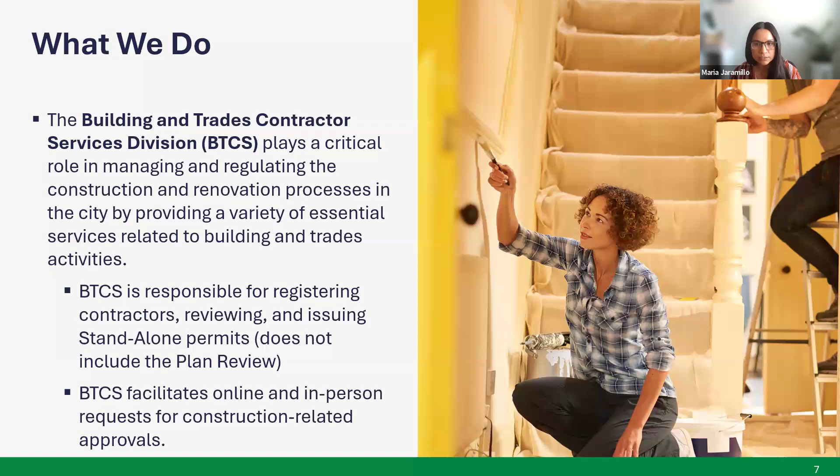The services we provide include contractor registration and support, homeowner permits (also known as homestead permits) and homeowner registrations, standalone building and trade permits that do not require plan review, activation or issuance of building permits and trade permits, and modification of standalone permits that do not require plan review or have not been through plan review. Usually, modifications of permits that have been through plan review require what is called a revision.

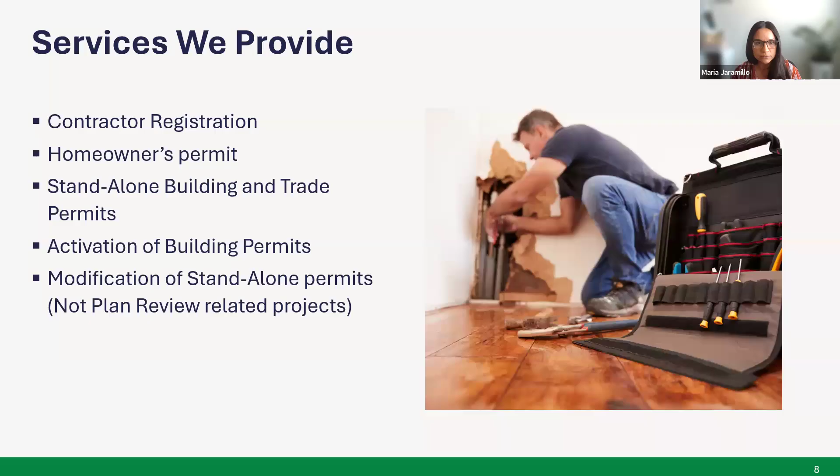Best practices, we recommend a couple of things. We recommend knowing what work is exempt from permits. There's a pretty good list put together that lists out what work is exempt from a building permit. For example, some painting, tiling, carpeting, countertops, playground equipment would be examples of what would not require a permit.

Another helpful practice is to know if the work that you're doing does require a permit. We have a really helpful wizard, the Do I Need a Permit wizard, that guides you through several questions on whether or not you will need a permit from the City of Austin, or what type of permit you will need if you're outside the city, depending on if you have services like Austin Water or Austin Energy as your utility providers. Then we want you to determine what type of project you have at hand.

After looking through the work exempt from permits, and using the Do I Need a Permit wizard, think about whether the project could need a building permit. Will it need plan review? Does the work include trade permits, or could it be just a standalone trade permit? Those are good questions to ask.

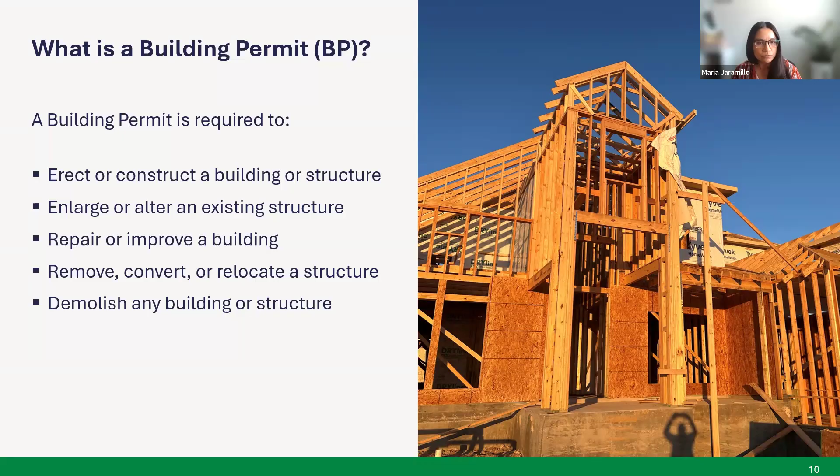Homeowners permits, or homestead permits, allow homeowners who meet certain qualifications to perform mechanical, electrical, and plumbing trade work for their own homes—work that is typically required of a trade contractor. There is a homeowner's permit page that we have, which also has a very helpful wizard within it that goes through the qualifications. Some of those qualifications are that you have a homestead exemption through the pertaining appraisal district, that you live in the home, and that you are performing the work if you're requesting a homeowner or homestead permit.

How to obtain a building permit depends on whether it needs plan review or whether it's a standalone permit. If it requires a plan review, you would submit a building permit application to residential review intake. After those applications and plans have been reviewed and approved, the permit would be issued, and then my team would help with the registration of the contractors, issuing of the permits, etc. A standalone building permit would be done directly from our individual webpage, the BTCS webpage, by completing a web form and selecting the applicable permit, and it would be processed directly through us.

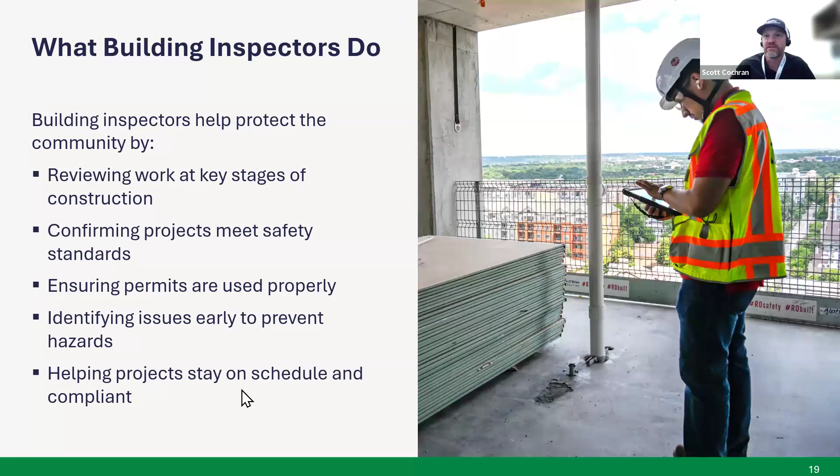What we do, and why do we require permits? Again, it's the safety of the occupants and neighbors—first and foremost, that's literally for your safety and welfare of you and your family. What sometimes gets a little lost in the shuffle is that you currently own that structure.

So why do I need to comply with, let's say, pool requirements if you put a pool in your backyard, or alarm requirements if you don't have kids? Well, we're not there just for the present snapshot in time—we're there to foresee the future, whether this will be a hazard to someone else. This includes compliance with adopted building codes, fire and life safety protections, proper installation of electrical, mechanical, and plumbing systems, and construction that meets structural standards.

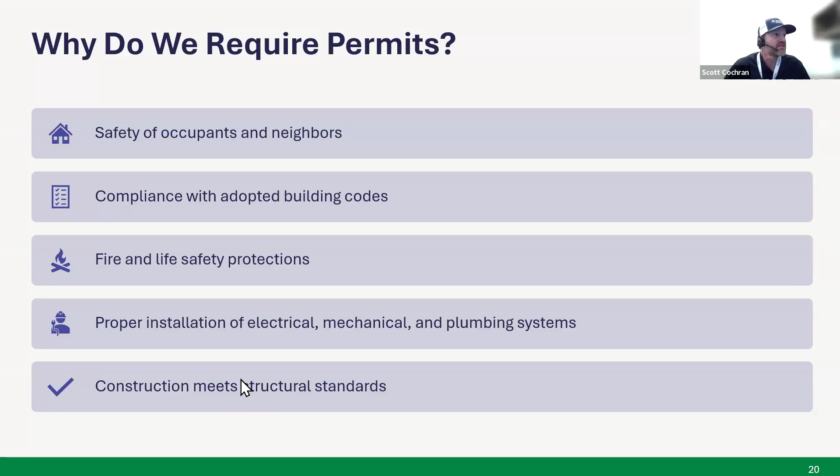Why should I get a permit? Living in the city of Austin, it's required by local city code. In some cases, it's required by state law, depending on what trade you're doing. Again, required under adopted technical codes. And getting a permit ensures your project meets safety and legal standards.

I can't tell you how often we see, unfortunately, we come behind on the backside of an unfortunate homeowner that has hired someone to do work. They did it on their own, unpermitted, without oversight of an engineer for their plans, and now we're having to work backwards and uncover wallboard and so on, and still including the oversight of engineers that costs $2,000 a piece. So it's important to do the right thing in the beginning. It'll work out for you and your family in the long run that way.

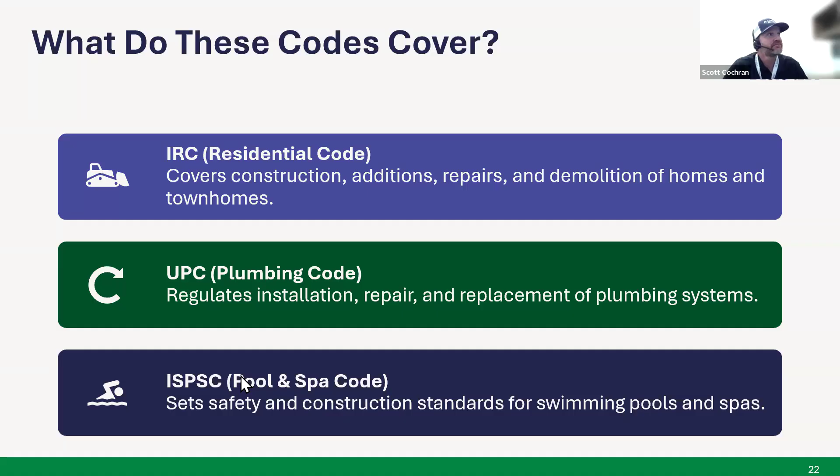Next slide. When a permit is required, it is very broad, I would say. I kind of want to set the expectation before I get into these slides.

I would fully encourage you to go on to the Do I Need a Permit wizard that Maria was sitting on a minute ago. Try to get into and log in to view our Land Development Code where we've amended the IRC and the UPC, and kind of get an idea, wrap your hands around what we actually do and don't require.

But I try to hit on the more frequently asked questions when it comes to this. So when a permit's required, constructing, enlarging, altering, repairing, moving and demolishing of structures. If you're doing any of those things, the first question you should ask yourself is, do I need a permit? Go online and try to find those resources to determine that. And then of course changing of occupancy. Next slide, please.

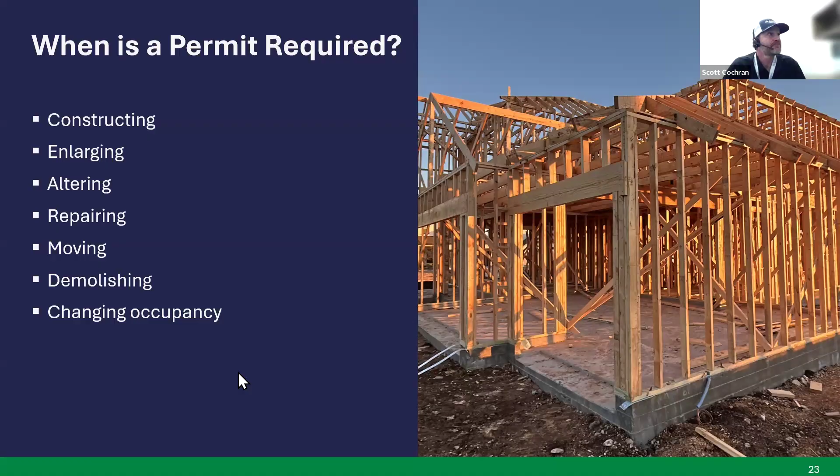To continue, when a permit's required: installing or modifying electrical systems, plumbing systems, mechanical systems, gas systems. Permits must be obtained before the work begins. In emergency situations, you have, I believe, 24 business hours to start beginning those stages of grabbing a permit. Again, there are certain things you can do within these systems that are listed that you may not need a permit for. So it's a very broad area of trying to figure out if you need a permit. I just encourage you to go online. Next slide, please.

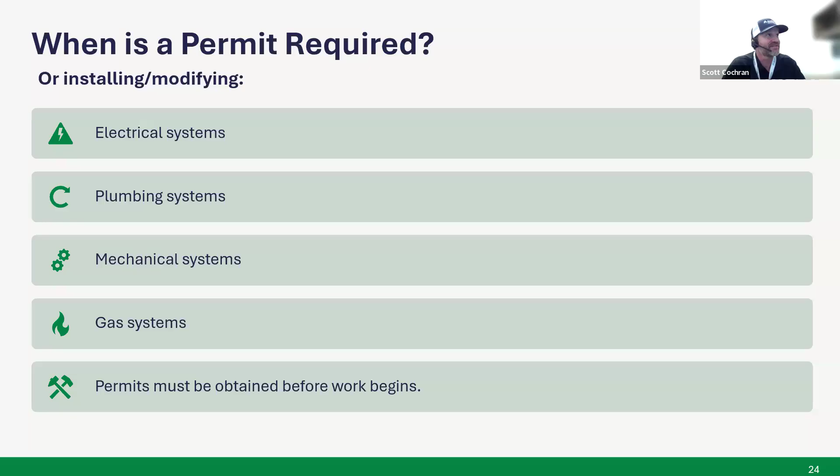Work exempt from permits for residential work. Again, just kind of touching on the more commonly asked questions that we get. For small structures, detached accessory dwellings, 200 square feet or less, under 15 foot tall, no plumbing, I would say no electrical as well, not used as a living space.

Fences and walls 7 feet or less don't require a permit. Retaining walls less than 4 feet high, no surcharge or load. I would say retaining walls are always one that we get. You have to include the footing, which goes underground, you can't just measure from the grade up. We also take into consideration if it's supporting a load or not.

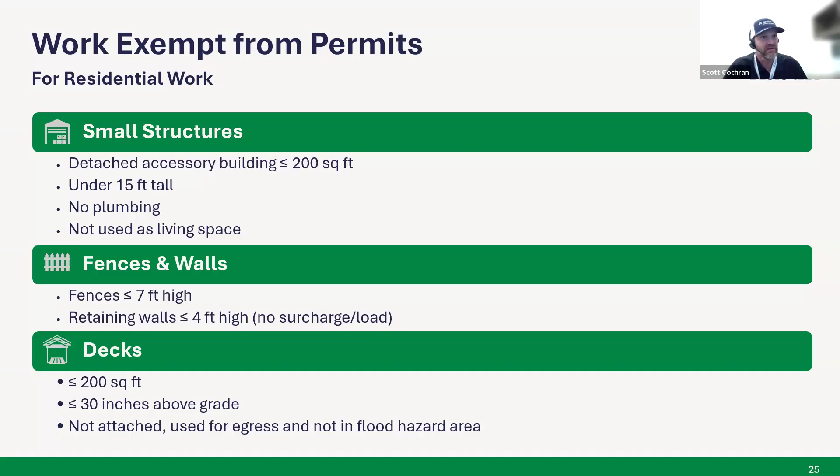Decks as well, 200 square foot or less, 30 inches above grade or more would require a permit. Not attached, use for egress and not in a flood hazard area. Again, these are just some very, very common questions that we get. All this information you can find online or in the Land Development Code. Next slide, please.

Residential minor work exemptions. I'm not going to read through all of these, but I would say site and exterior prefab pools 24 inches deep or less, that's a big one that we get quite often. Roofing exterior repairs, another we get, is if you're just replacing your asphalt shingles and you're not in what we call a WUI area, wildland urban interface area, with 50% or more replaced.

Those will not require a permit. If you're replacing your decking 128 square feet or more, it would require a permit.

Interior and structural repairs, I think Maria hit on this a little while ago. Finishing work, paint, tile, cabinets, and so on. Anything less than 128 square feet, or if it comes to wallboard, foundation, or floor decking, wouldn't require a permit. Garage door replacement, same size door replacement, also wouldn't require a permit.

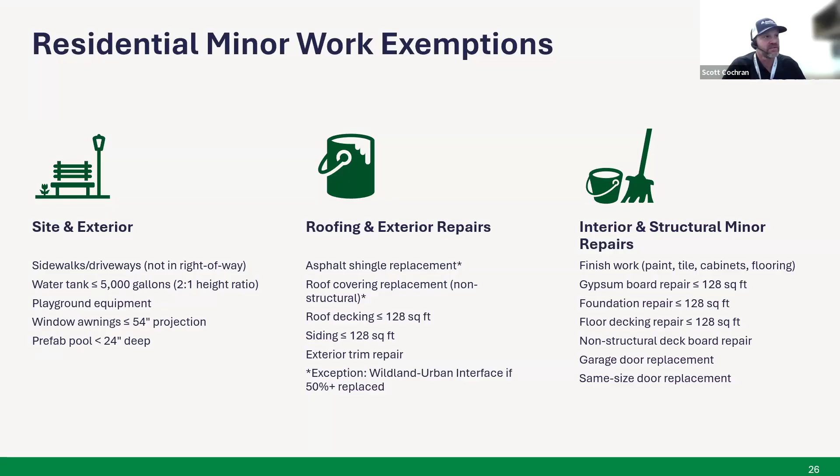Again, it's a wealth of information, and I would just encourage you to go on our website. That will be it for me, and I'll pass it along to Colin.

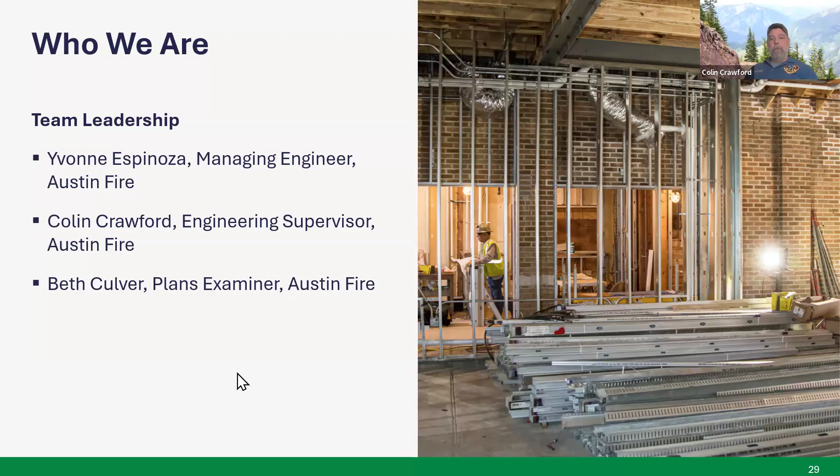Fire prevention at plan review, this isn't about inspections, it's about plan review. We get involved in plan review at 3 stages really. We look at sites and subdivisions, could be replats, could be whole new subdivisions. A lot of single family homes don't have a site plan component, but some do. We also do the building review, actually reviewing the proposed structure. And then finally, if mitigation is required, we will do the sprinkler plan review.

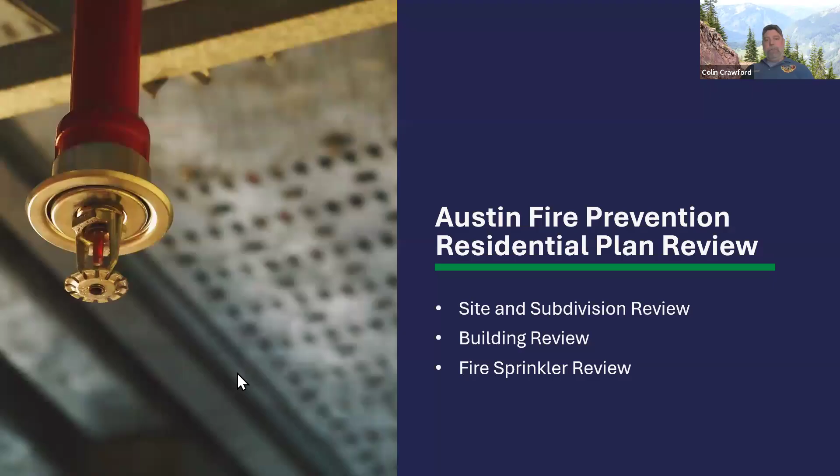Next slide, please. Primarily in a subdivision, we would look for essentially access roads. We would look at the hydrants and some of the hydraulics of the site plan of the subdivision itself, and if there's any special conditions or special circumstances, we would take a look at those as well.

One thing to be aware of is we do require that for a single family home there has to be at least one hydrant, and sometimes more than one, within 600 feet. You have to be able to get from the hydrant to every portion of the outside wall of the home within 600 feet. And so if you have a condition where that's exceeded, we may require mitigation, because it can delay firefighter response and the ability for firefighters to respond to an incident.

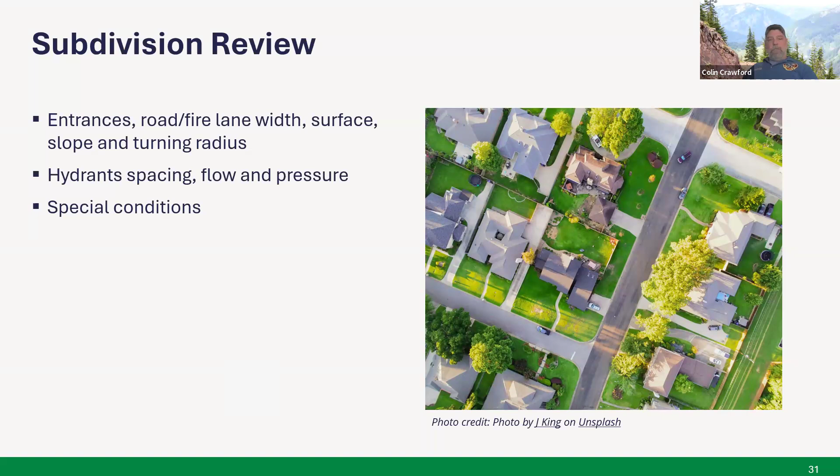Next slide, please. For the fire lanes, we look at the fire lanes and roads. We're looking at the surface. The surface can affect, for instance, maximum slope. We look to see if it supports our apparatus structurally. We also have some minimum sizes, like the width of the fire lane or road, the overhead clearance. We have requirements for those, so our apparatus or fire trucks have the ability to get to the incident and the ability to leave, to get away from the site when they're done.

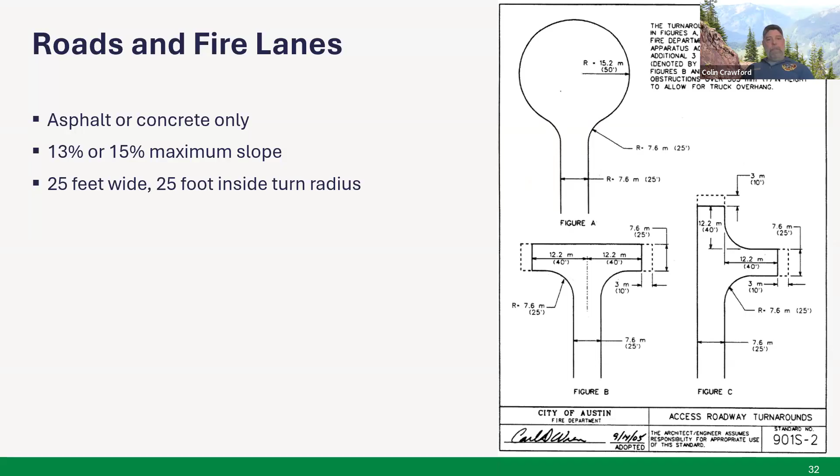Next slide, please. As I mentioned before, at least one hydrant, if not 2, and it depends. For one hydrant, there's a minimum flow required of about 1,000 gallons per minute to fight a small house fire. But as the size of the home, the size of the fire area increases, the flow demand increases. One hydrant can really only support a theoretical maximum of about 1,250 gallons per minute, which means if you have a flow demand of 1,750 gallons per minute because your house is more than 3,600 square feet, you're going to need more than one hydrant. So you're going to need 2 within that 600-foot distance.

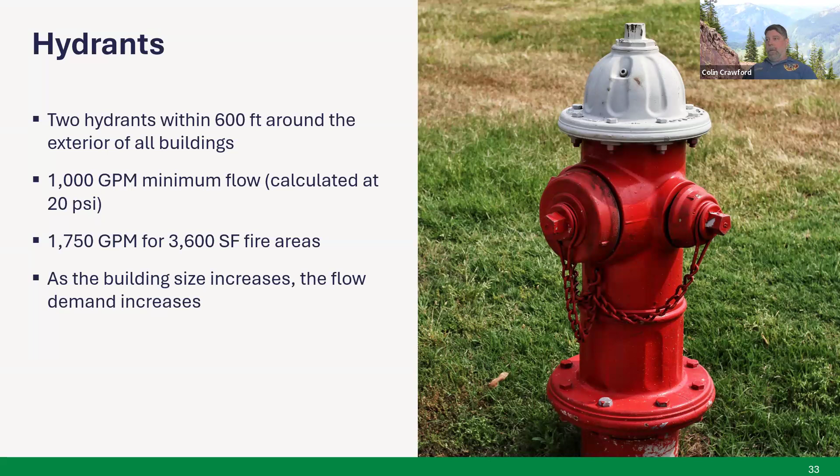Let's see. Next slide, please. So flag lots are a site plan issue for single family homes that you might encounter. A flag lot basically restricts the firefighter's ability to access the home and typically extends the distance. So we typically have to review those to determine whether or not there's going to be an issue.

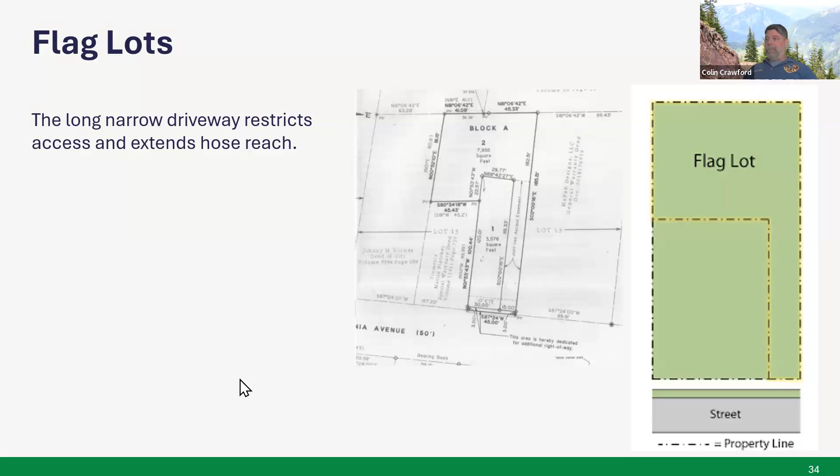Next slide, please. We also have many places in the city that have inadequate flow. They don't have that minimum 1,000 gallons per minute, or possibly a higher flow depending on the requirements. There are places that don't have hydrants or just no water altogether, so we'll take a look at those. The main thing to understand is the code essentially requires a certain amount of water availability. For a typical small house, the fire department could use possibly 60,000 gallons of water to fight that fire. If the house gets bigger, it could be something closer to 250,000 gallons of water. Where we don't have water infrastructure or it's inadequate, the fire apparatus has a small tank aboard, about 500 gallons, and they need to essentially ferry water from a water source to the house fire. So you can see it's a very resource intensive problem to fight that fire, which is why it's so critical to mitigate the situation where there's inadequate flow or inadequate access.

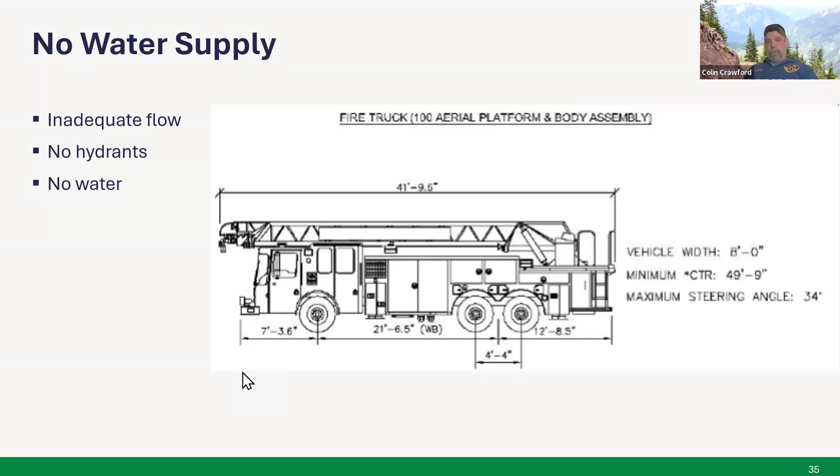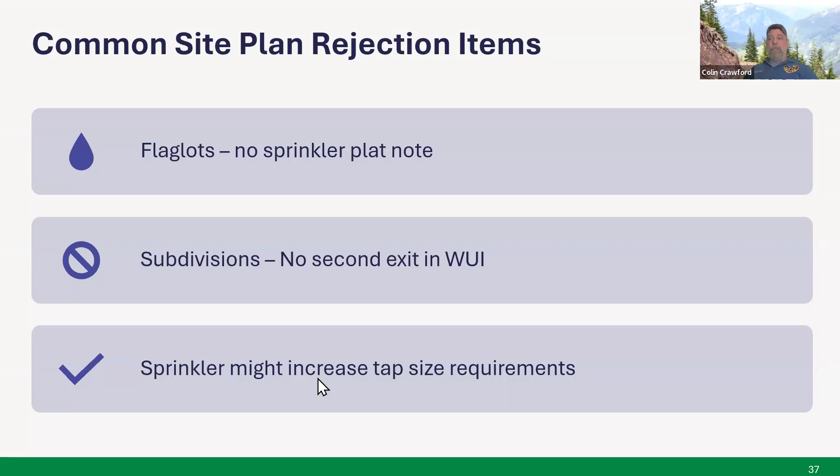When we get to the actual building review, we did look at flow and hydraulics at site plan sometimes, but we have to reevaluate it based on what you're actually proposing to build. So one of the first things we look at when we get your plan is access.

The fire code requires that a fire department has to be able to get from the fire access road, basically where the fire truck parks, to all portions of the outer wall of the building within 150 feet. There are some mitigations and exceptions.

If it's a one or two dwelling units on one lot, we can extend that distance out a little bit. If you have a sprinkler, that's a mitigating factor, and we can extend that distance out a little bit as well.

Generally speaking, with what we call the home amendment, the new third dwelling on a lot, I found that most of them, not all, but most, it's very difficult to fit a third unit on a single family home lot without having it fall outside that 150 foot access travel path.

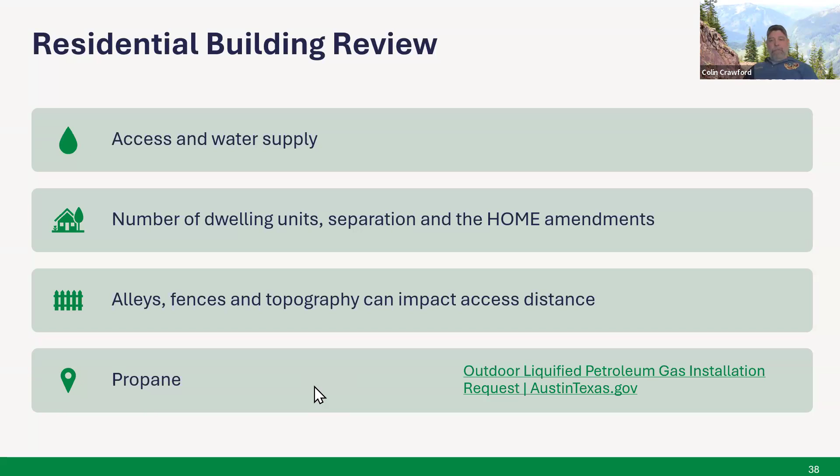One thing we're reviewing for at the plan review level is the riser location. We can't treat Central Texas the way it was in the past, as a place that doesn't typically freeze—that's just not true anymore. We've had a rash of broken pipes out there, so we are requiring the riser location to be freeze protected.

The best way to do that is to put it inside, so it literally rises out of the ground in a conditioned portion of your house. We're asking you to show that on your plans.

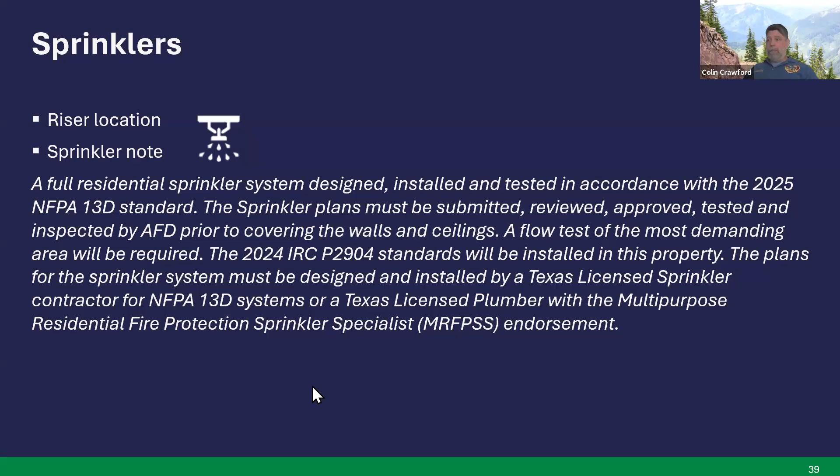Most common rejection items I've seen when reviewing a house for fire compliance: either we don't have a flow test or the flow test is expired, or we have inadequate access—meaning you're too far away from the point of fire department access—or we've got that third dwelling issue.

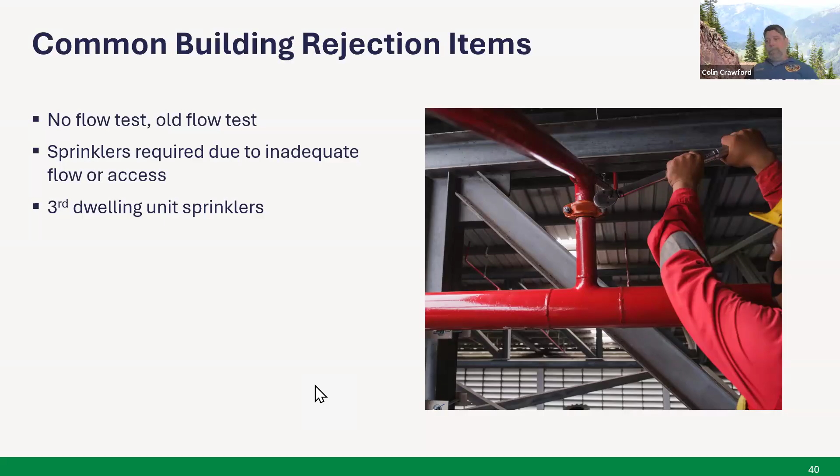Next slide, please. Okay, next slide.

When we review the system plans for the sprinkler itself, we're reviewing it against the NFPA 13D standard for a single family home. We'll look at a lot of different things—I'm going to go over some of these details here.

We check if the floor plan matches what was presented in the architectural plan, and if a professional has sealed the plans and dated them properly. This is critical: we look at the data sheets for all the equipment used in the sprinkler system to make sure it's listed appropriately for the purpose. And then we look at the plans.

Next slide, please. We'll look at the plans to... sorry, go ahead and move to the next slide.

We also look at the plans to make sure that the equipment on the plans matches the data sheets you've provided, to show that it's appropriate.

We'll go ahead and re-review the hydraulics. If your flow test is out of date, we're going to ask you to get a new one to make sure that the flow and pressure at the street is adequate to supply the system.

We're looking again at the water line route. Sometimes the riser location changes between plan review and system plan review. That's understandable, it happens, but we do need to look at it to make sure it still meets our code requirements. And then we'll look at the most demanding area in terms of what the sprinkler has to do, and then we'll look at your calculations to see if it's back calculated and the system will support it.

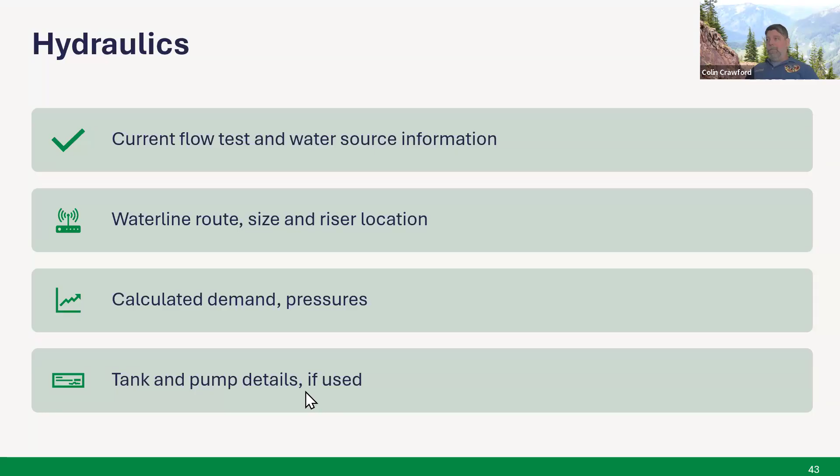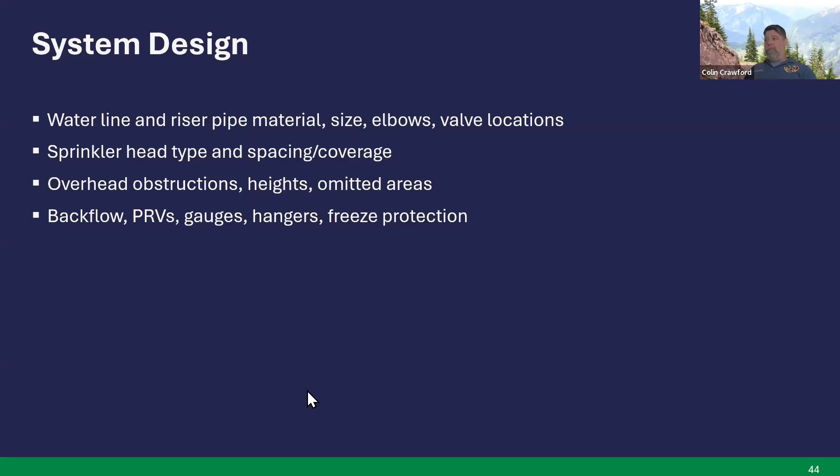A lot of other details in the system plan review: the water line, the riser, the elbows, the pipe sizes, the valve locations, if the sprinkler heads are the correct type, if they cover appropriately, if there's any overhead obstructions. We even look at structural, how they're hung, if there's any gauges or backflow preventers, pressure reducing valves.

So the most common rejection items we seem to see in a sprinkler plan review are the riser location and freeze protection, the spacing of the actual sprinkler heads, and hydraulic calculations missing or inadequate.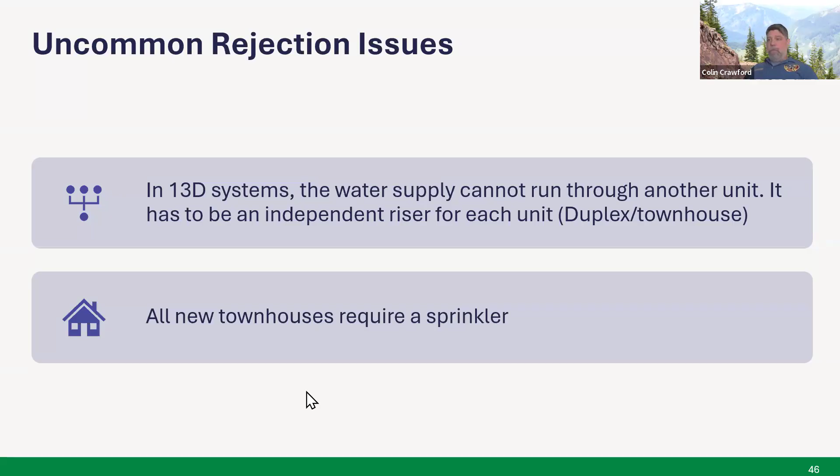I'm Beth Culver, I'm the lead WUI plans examiner with Austin Fire.

So I'm going to walk through the basics of the Wildland Urban Interface Code permitting requirements. This code applies to areas in Austin that face a higher risk of wildfires. Our goal is to help you understand when the Wildland Urban Interface Code applies, what it requires, and how to prepare your permit submittal. By the end of this segment, you'll know the 5 steps you'll need to follow for any project in a WUI area.

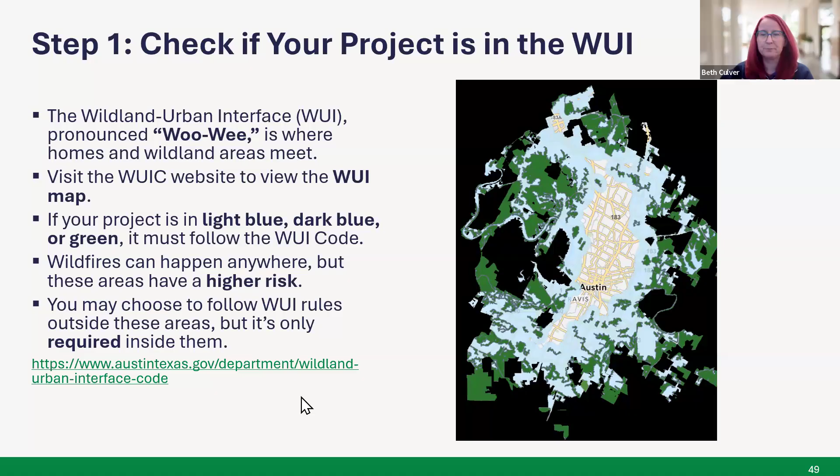So step 2, once you know your project is in the WUI, the next step is figuring out which zone you're in. Zone C is the areas in light blue or in the layer labeled Zone C. Zone A and B are shown in dark blue. And then green areas are currently wildland, which will become either Zone A, B, or C, depending on how much of the land you end up developing or leaving wild.

If you're not sure what color you're looking at, you can always click on the map and a label will pop up. If your project is in a dark blue or green area, you'll also need to measure how close your structure is to the nearest wildland area that's planned to remain as wildland.

The map shows wildland in green to help you locate it, but the green layer is only an approximate guide, so you still must measure to the actual wildland edge, not just to the green layer on the map. You can do that on site. A good rule of thumb: if an area isn't watered or mowed weekly, it's probably considered wildland.

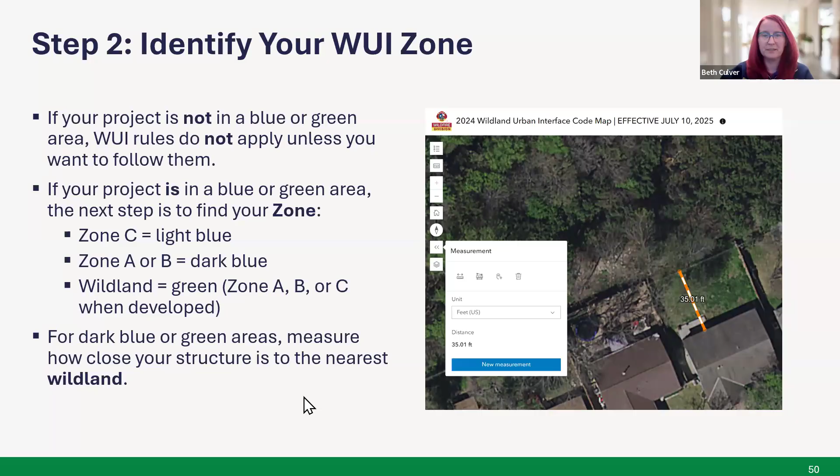Step 3 is understanding what the WUI code requires. Austin uses the International WUI code along with local updates that reflect our specific vegetation, building styles, and wildfire behavior. Here's a quick breakdown of the requirements.

Chapter 4 covers access, which is how firefighters reach your property, how you evacuate, and how water is supplied. Chapter 5 covers ignition-resistant construction. This is where your zone matters. All zones follow the basic sections, and each zone has additional requirements for exterior materials and openings.

Chapter 6 covers vegetation management and the Ember Ignition Zone, which is a 5-foot non-combustible zone surrounding all new buildings and additions to existing buildings. Appendix A is another good place to become familiar with, as it covers rules for things that create sparks or heat like fire pits, grills, and generators. Make sure to visit the WUI code website for a simplified guide that outlines the rules for each zone.

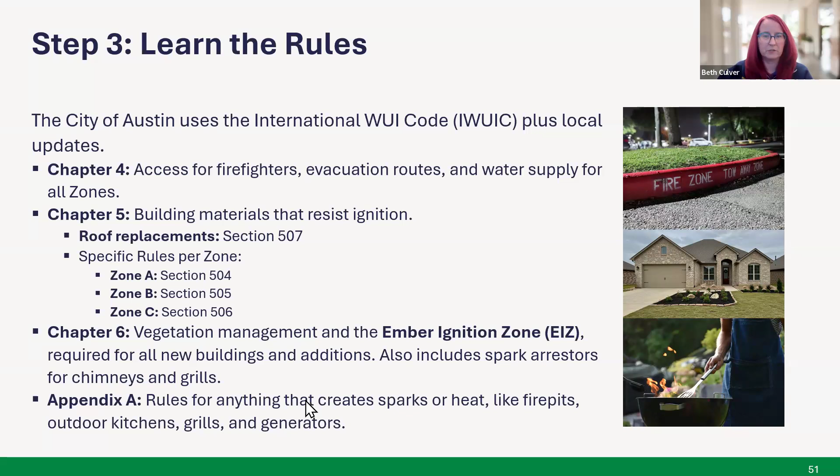Step 4: determine whether your project needs a permit. Our website lists which projects are exempt from permits. This was covered earlier in the presentation, but keep in mind that even if a project doesn't require a permit, it still needs to follow the WUI code if it's in a WUI area.

One important note: if you're replacing more than 50% of a roof in a WUI area, outside of a WUI area you might not need a permit, but within a WUI area you must get at least an express permit, or if you have a larger scope of work, you can include the work within that permit. Outside of the WUI, some roof replacements may not even require a permit if they're not associated with another project. There are only 2 types of projects that don't have to follow the WUI code at all.

The first is small accessory structures under 120 square feet that are more than 50 feet away from another structure, as they pose less risk to other structures as long as they're at least 50 feet away and small, like a small shed. The second is agricultural buildings that are also more than 50 feet from another structure, more like farm type agricultural buildings.

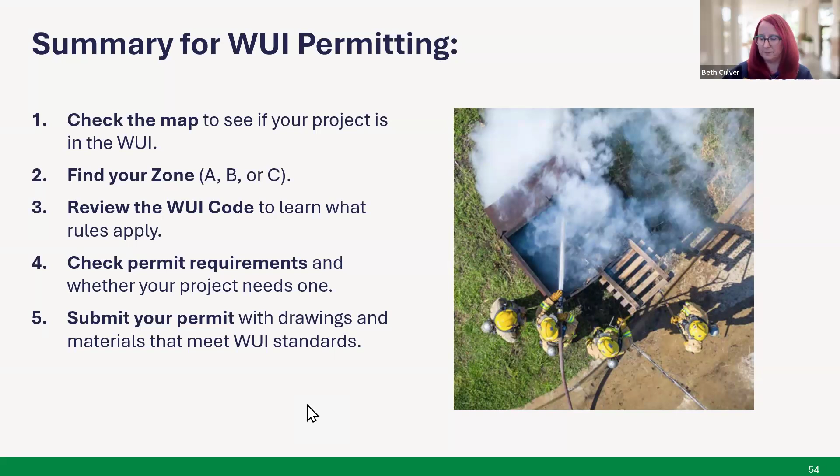The resources available on the Wildland Urban Interface Code website include, but aren't limited to, the WUI map, plan review resources, the list of pre-approved materials I mentioned earlier, as well as FAQ.

Thanks for taking time to learn about the WUI Code permit requirements. Following all of these steps helps protect your project, your neighbors, and our entire community from wildfire risk.

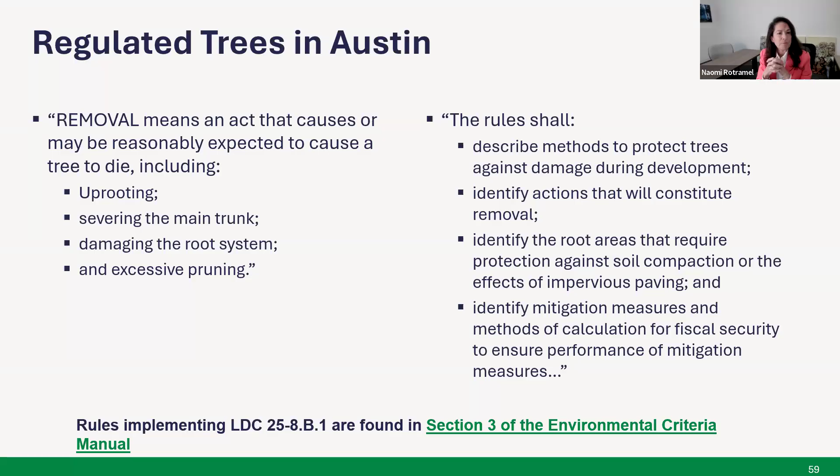There are a couple of paths regulated trees go through in the development process: either they're preserved, which must meet the criteria in the Environmental Criteria Manual 3.5.2, or they're removed, and that definition of when they can be removed is under the Land Development Code 25-8-624.

You can find a lot of information on our homepage. If you do a simple Google or Bing search for City Arborist, Austin, Texas, it'll land you on this homepage. We spell out the levels of protection, and also have a lot of helpful FAQs and instructions on applying for a permit and applying for an ABC account, which Maria mentioned earlier.

Regulated trees in Austin include all trees once they reach 19 inches in diameter, including ash juniper and invasive hazardous trees. Certain tree species are designated as heritage once they reach 24 inches diameter, per LDC 25-8-602. Those include oaks, pecans, elms, walnuts, and other trees. Palm trees are not regulated under the city ordinance. So yes, a hackberry is regulated, and yes, an ash juniper is regulated.

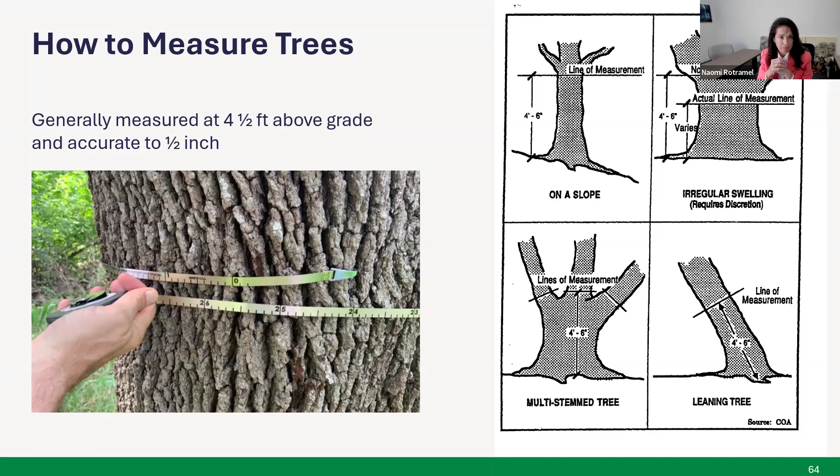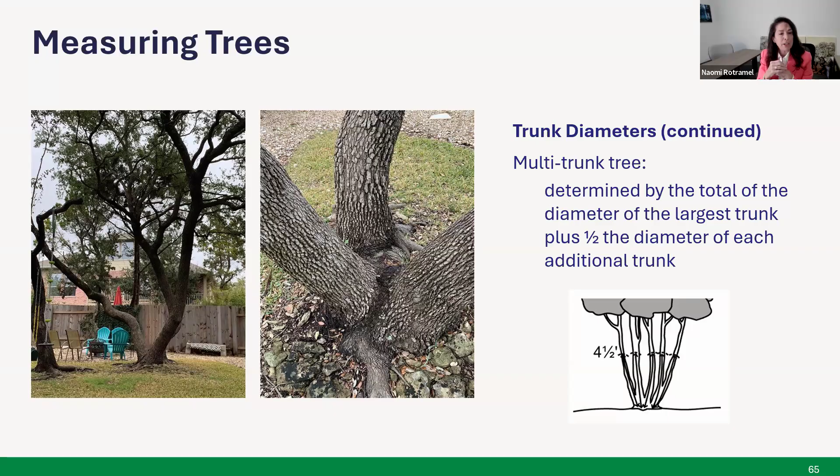There's also a way to measure multi-stem trees. You take the largest diameter, add up all the smaller diameters, divide that by 2, and add it to the largest diameter. So there are instructions on our homepage on how to measure a tree.

Back to going through the tree rules in the Environmental Criteria Manual. Most damage to trees occurs during the development process. Trees are protected both through review of plans and enforcement of tree protection on active construction sites. The tree preservation criteria are the rules the city uses to determine whether or not a tree is likely to survive construction, a project, or other impacts, based on best practices. If these criteria are not met, the tree is at significant risk of premature death, such as impacts that constitute removal. Many times trees do not die immediately after construction damage; it can take 1 to 3 years for them to die. So we do want to see the protection up at all times.

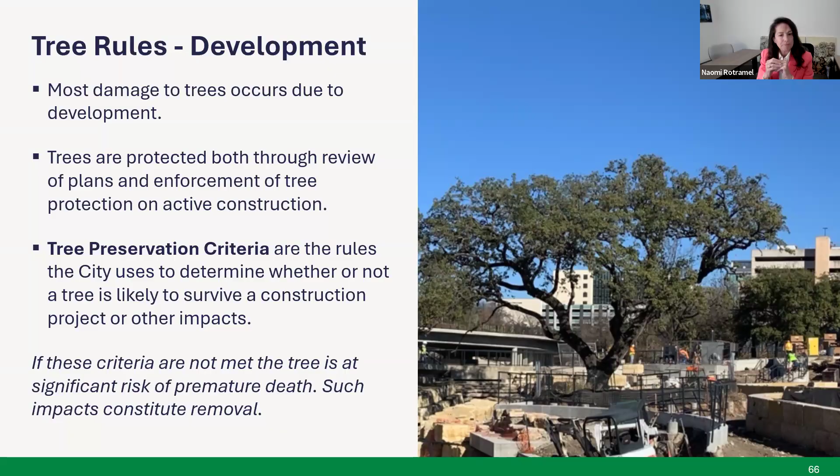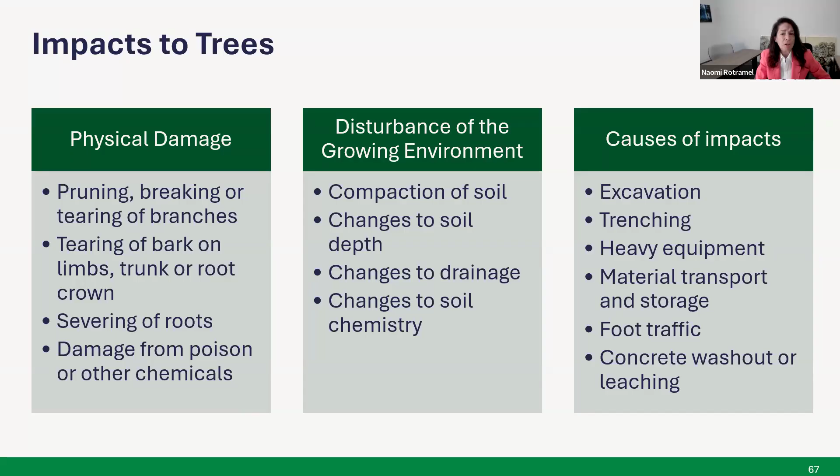Let's talk about impacts to trees: physical damage, disturbance to the growing environment, and some causes of impacts. Physical damage, which happens on construction sites, includes pruning, breaking and tearing of branches, tearing of bark on the limbs, trunk or root crown, severing of roots, and damage from poison or other chemicals. Disturbance includes compaction from running over the soil, changes to soil depth, changes to drainage, and changes to soil chemistry. Causes of impacts include excavation, trenching, heavy equipment, material storage and transport, foot traffic, and concrete washout or leaching.

Here's some examples from active construction sites. On the front, they do have wrapping around the tree, but fill right in the critical root zone, probably in the quarter critical root zone, and there's cement washing out. Another site where a tree has soils next to it. The picture in the right-hand corner was likely done without a permit - that was spotted by one of the inspectors, and that is trenching inside the critical root zone of a couple of heritage oaks. The last picture on the bottom is fill and inadequate fencing.

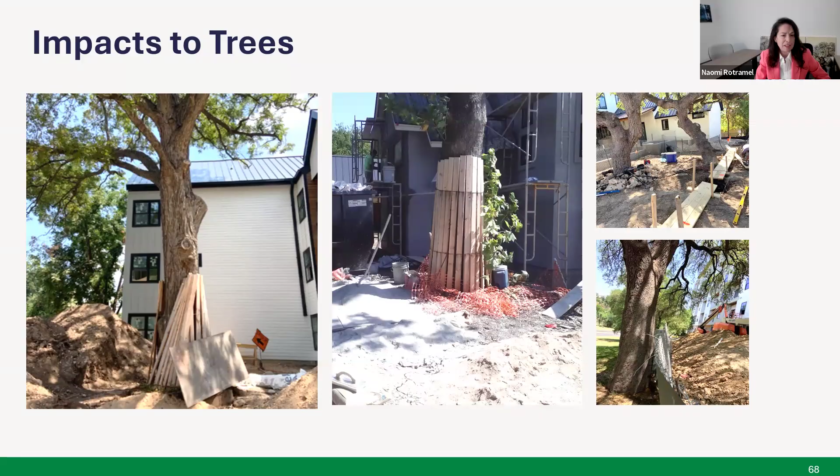Along with impacts in tree review, we're going to look at the existing impacts. Here's a good example of a residential house that the applicants needed to expand. We're going to look at existing impacts and matching those existing impacts, which would be no wider nor deeper. Your tree reviewer will help work this out with you. Here's a good example of existing calculated impacts.

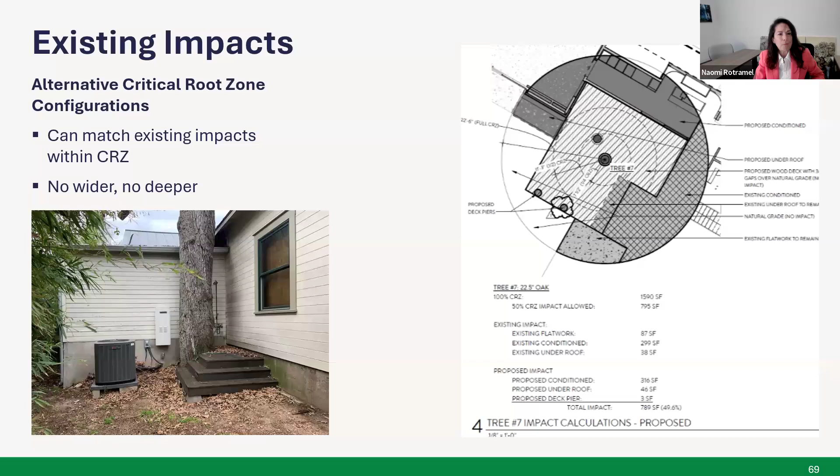So a little about tree preservation criteria. You can find this figure on the right in the environmental criteria manual. It's widely adopted throughout the United States. It defines a critical root zone. Tree roots are usually much larger than a critical root zone, but this calculation is based on best practices and what it takes to keep a tree alive.

So if you have a 20-inch tree, you're going to walk out 20 feet, and that's your full critical root zone. Inside that, the half critical root zone would be, in this example, 10 feet, and then inside the quarter would be 5 feet. So the critical root zone is a circle around the tree, the radius in feet equal to the diameter in inches of the trunk. The half and the quarter are smaller circles within the CRZ, and the CRZ, critical root zone, is not the extent of the tree root system.

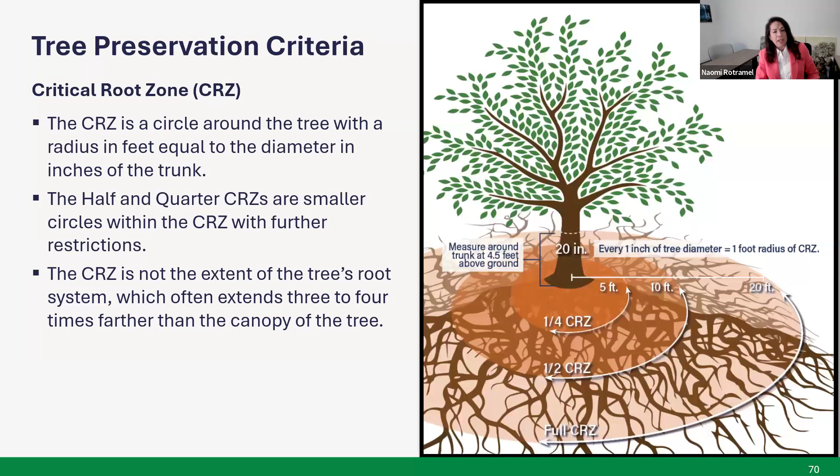What we are looking for in plan review, site plan review, residential plan review, and standalone tree permits, which I'll get into later, is criteria one: no more than 50% of the total critical root zone may be impacted. A little example here: 50% impact would be not compliant, 30% impact would be compliant. And then we have trenching and 60% impact. Unlike impervious cover, if you sever the arm and expect the hand to survive, it won't. So we're going to look at that trenching also in the impacts.

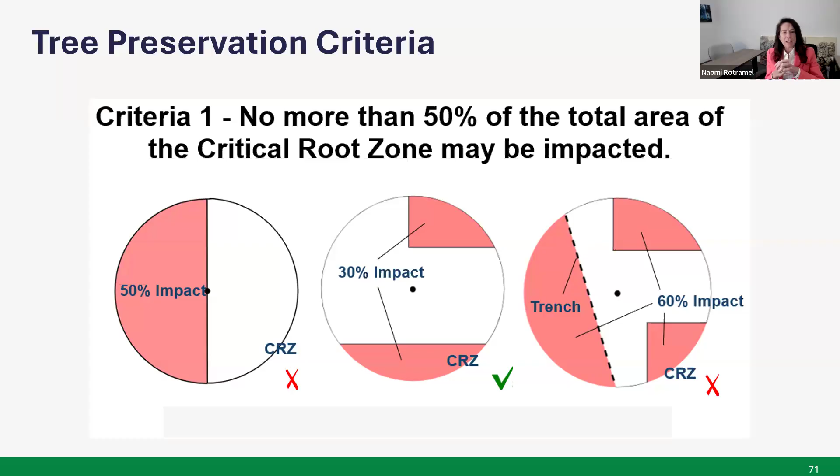A little bit more in detail, we can provide anybody on this meeting with these impacts. We're looking at elevated foundations, impacts for existing impacts, new impacts. On the top, what we would have would be compliant for tree preservation criteria, and the bottom wouldn't be, and that includes, you know, some retaining wall or new impacts.

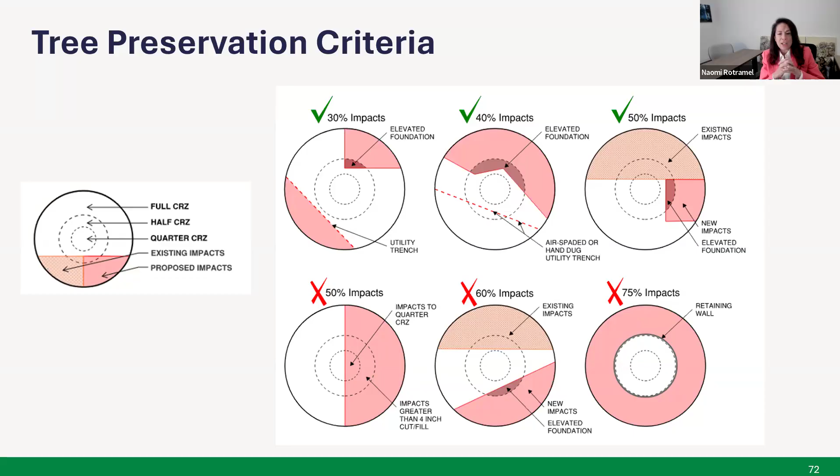And then our third preservation criteria is no more than 25% of the living crown may be removed. More than that, it starts interfering with the biology and physiology of the tree itself.

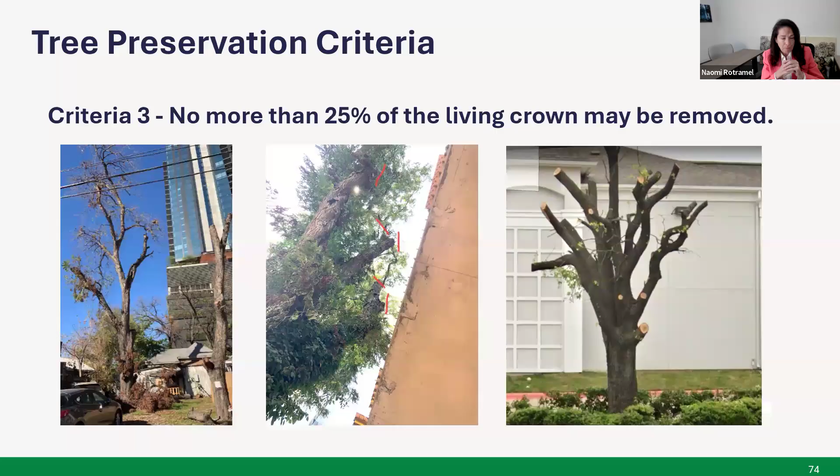Then we will talk about tree protection fencing, which is located in section 3 of the environmental criteria manual. Fencing would be a 5-foot chain link on 8-foot steel posts, around the entire critical root zone not approved for impacts or necessary for access. Mulch 8 inches deep in all unfenced areas of the critical root zone not approved for impacts, 3 inches deep in any area of disturbed soil within the fencing. Then topping with decking inside the half critical root zone. We're looking for trunk and branch wrapping only when the fence is within 5 feet of the trunk, or when low branches are at risk of being struck by equipment. Do not secure the planking directly to the trunk, as the tree grows out, it starts to girdle the tree.

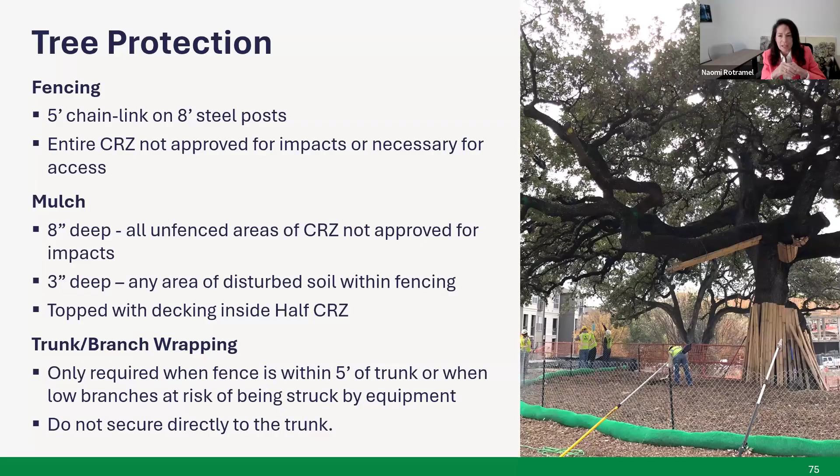And here's part of our team doing an air spading training.

What we're going to look at is residential tree review. Trees 19 inches and greater in diameter are regulated, and that's distributed on the plan review, handled through residential applications. You do want to mark yes if you have a tree 19 inches and greater on the property, or on the adjacent property that the critical root zone extends to.

On commercial multifamily projects, trees are regulated at 8 inches and greater. These include site plans, site plan exemptions, corrections, and subdivision phase review. We also have standalone tree permits. These are non-development related, such as dead disease imminent hazard, frequently called DDI. We have emergency utility repair and replacement, non-construction related projects not subject to a building permit, or violation related.

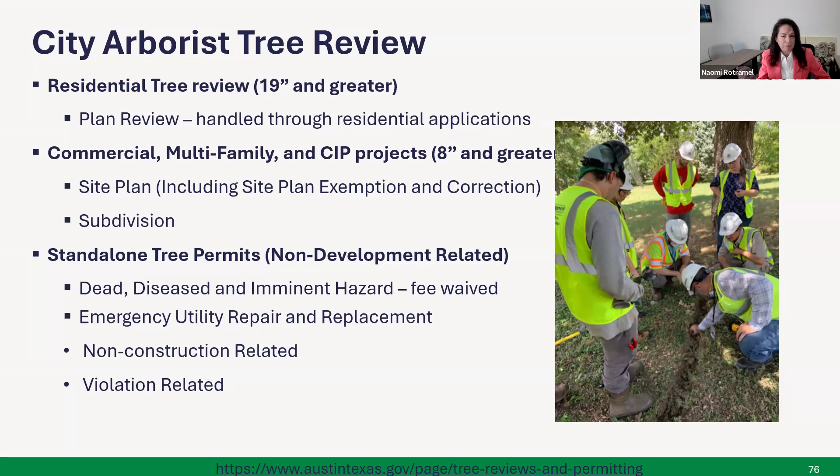This is a good example - the plan set that was brought up by the American Institute of Architects, Austin chapter. We collaborated with them on getting nice templates, and we have access to these templates on our webpage.

We review residential and site plan applications. We assess hazards and tree health for protected trees proposed for removal. We assign mitigation for approved removals, and we issue tree permits and approve site plans.

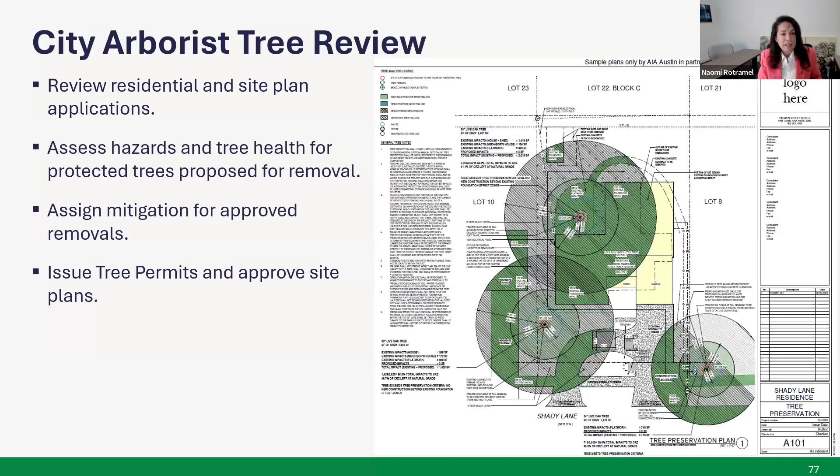Not all development applications will trigger a tree review. If you're going to work inside the critical root zone of a protected tree, or propose to remove more than 25% of the crown, you will need a standalone tree permit.

City Arborist review is not distributed on express or interior remodel building permits. However, you will still need to be compliant with the preservation criteria on these projects, and those include standalone trade permits, landscaping, or flat work. Any of these projects may require a standalone tree permit if you're going to potentially impact the critical root zone of a protected tree.

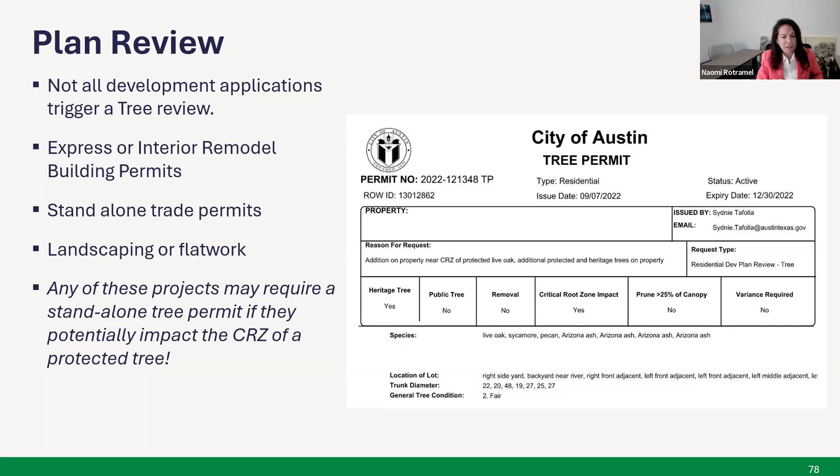And here's a good look at an old tree permit that was issued as part of a plan review. It's updated now, and we can go into that another time.

On site plans, you must have a licensed tree survey, reviewed by city arborist staff - that's from a licensed land surveyor from the state of Texas that also surveys metes and bounds and other topographical features. Those are required on commercial, multifamily, residential, and subdivision plans. The approved site plan is actually the tree permit.

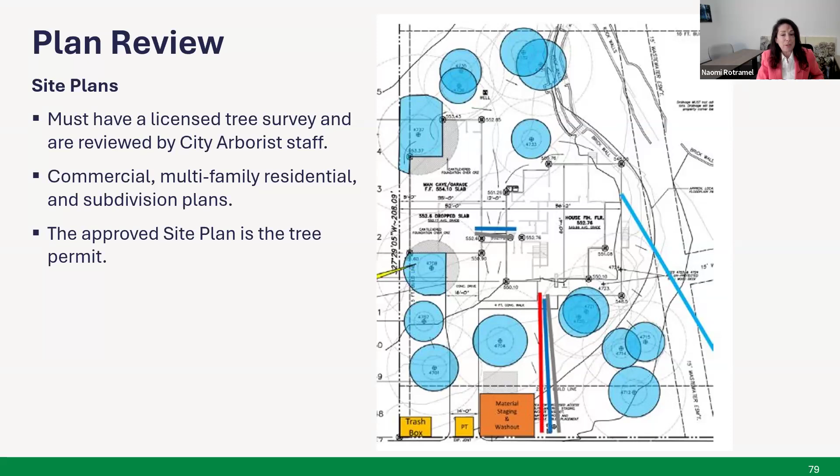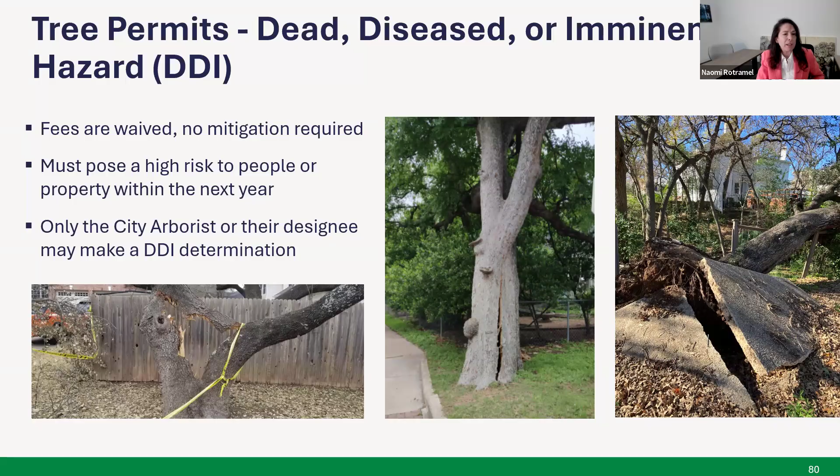One of the most frequent things we see after storms is our dead disease imminent hazard process. The fees are waived, no mitigation is required - that's in the Land Development Code. They must pose a high risk to people or property within the next year. Only the city arborist or their designee may make a DDI determination.

After the plan review and building permit is issued, the compliance for preservation - what was approved on the plans - is turned over to the Environmental and Tree Inspections Division. They ensure that tree protection is in place at all times, that pruning does not exceed allowed limits, that special conditions identified on the permit or in the plan set are followed through, that no trees intended for preservation are removed, and the required mitigation is planted. If you go to the Environmental Inspections Division webpage, you can see the territories of the inspectors.

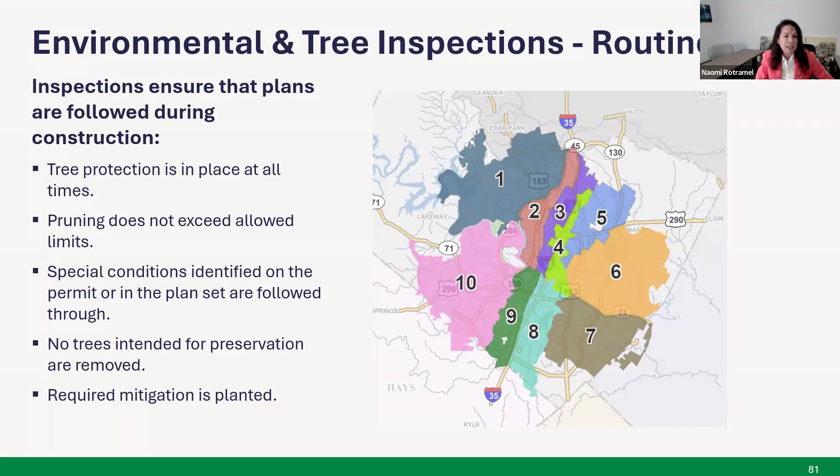There is another part of the Environmental Inspections Division that is enforcement. Those enforcements are all done through 311. The removal of a protected or heritage tree is a Class C misdemeanor. Environmental inspectors can write citations, issue affidavits, and also issue enterprise code violations that can require mitigation, planting, or other measures to correct the violations.

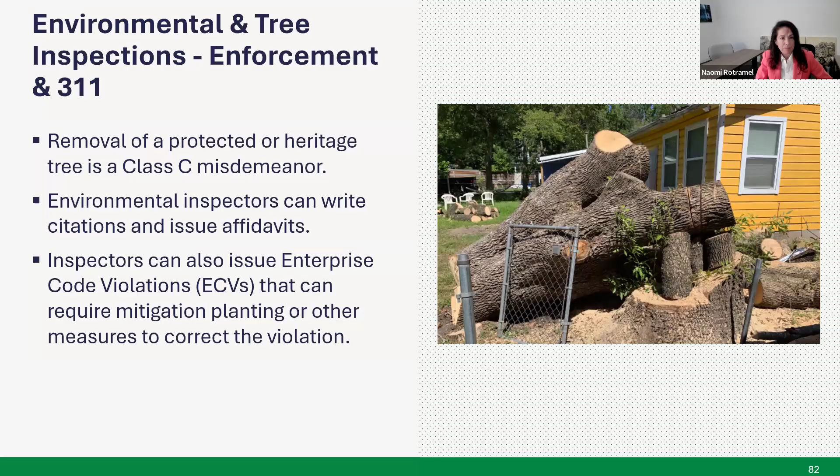For environmental tree inspections enforcement, most types of cases are initiated through the 311 report. Environmental code complaints can also require remedial tree care, mitigation, or planting to restore the site to code compliance.

And I'll turn it back over to Ulysses. Thanks so much, Naomi, and thanks to all of our subject matter experts for all the information you were able to provide to our attendees. We learned a lot about why we have permits for trees, overviewed information on what's required, and what trees are regulated. Thank you so much for that, Naomi.

And then we had our experts on fires discuss why some of the requirements exist, to make sure that our folks at home are safe and that they meet the standards that Austin Fire needs to be able to keep all of us safe. If we can go to the next slide, please.

We have 2 ways that you can participate. There's a few questions that have already been answered. So if you have the capability of taking a look at the Q&A function of Zoom, our staff members were able to go in. There's a few questions that were asked that have already been answered, including links to the websites that were mentioned or have already been shared.